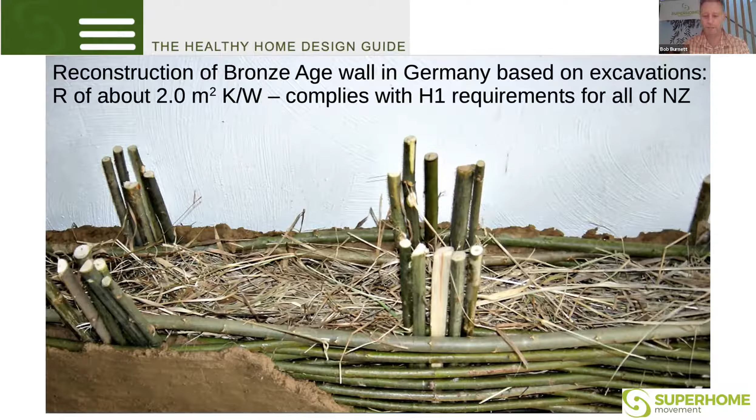What I also wanted to do is show where the Healthy Home Design Guide fits amongst other guides and standards. The Healthy Home Standards is the standard for landlords, and we were talking to landlords about this last night, so they're probably more familiar with this than most designers.

But basically, heating - just heat the main living room. Homestar 6, heat the main living room. We're saying you've got to heat the whole house and maintain that temperature in the healthy range of 18 to 24 degrees, at least 75% of the time, and prove that by your monitoring.

Insulation - we've gone away from the R value to look at what heat do you need to heat the house in a year, what heat do you need to retain in the house over the course of a year. What is a kilowatt hour per metre square per year rate of heating? That's what we've looked at, because these R values, we've seen from research from Beacon Pathway and others that they're not even giving half of what those numbers are due to all the thermal bridging.

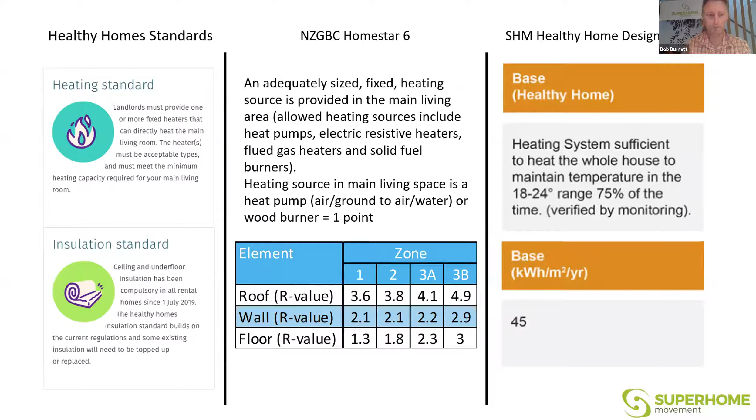Ventilation standard and Homestar are basically the same thing - open windows, kitchen and bathroom extraction fans. We're saying kitchen and bathroom extraction fans are good, but a whole house ventilation system is needed - not an HRV system from the roof cavity, but a whole mechanical ventilation system.

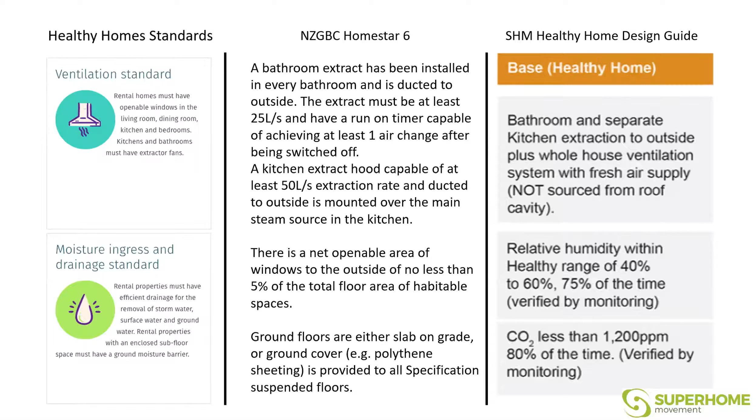And humidity is really important to control. It's humidity that's causing the mold. And then, as Katheren mentioned, carbon dioxide is also important.

Why is it important? This is a slide out of a house of mine that's been monitored over the winter, from July last year. This is a bedroom, quite a well-sealed bedroom, someone sleeping with the door shut. You can see that the carbon dioxide levels are 4 times what they should be. Even downstairs, the carbon dioxide levels occasionally go over the 1,000 parts per million threshold. So this just gives you an indicator of what's happening with other toxins.

That's what it's really for. But until we did this monitoring, I had no idea at all. So that's the value of the monitoring that Brandon will talk about later.

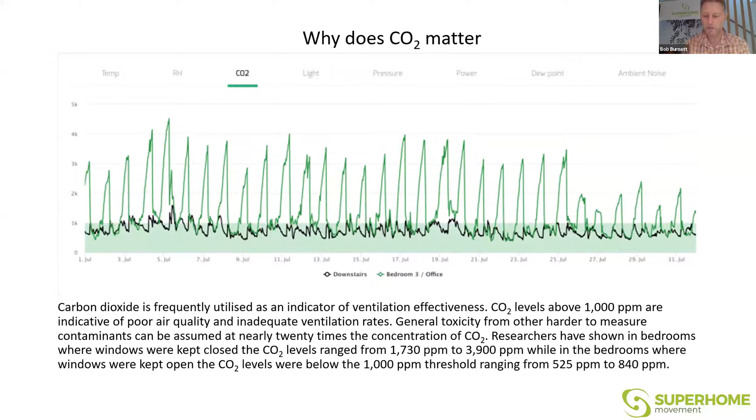Draft stopping, air tightness - well, unreasonable gaps and holes in walls is a pretty low bar standard. No air tightness is still a low standard. Australia have got air tightness standards. We're saying less than 3 air changes an hour is what we should be trying to achieve for a base level. That compares with best international practice of 0.6 air changes an hour, or on the other scale, your old villa, which is probably about 20 air changes an hour.

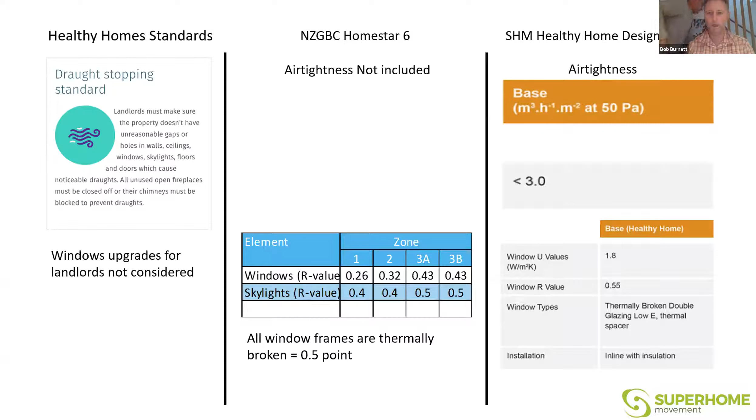And windows - an upgrade of windows. So we want thermally broken windows with a spacer, in line with the thermal envelope, not stuck out in the cavity like they are now. So yeah, that's what I've got. I will quickly swap with Bob and hand you over to Bob.

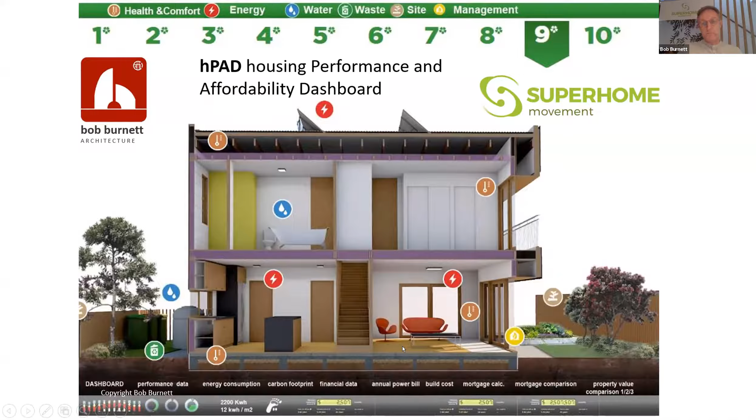So we talked to a group of property investors last night, and some of them were saying, oh yeah, that's all very well, but you're just promoting yourself, and how can people afford to do this? We can't even afford to put a bathroom fan in.

Some things we've done don't cost more. Advanced timber framing - I thought this GIBFIX idea, which this was the first house to have, though it wasn't actually called this at the time, would just be the new normal because it's actually cheaper - less timber, more insulation. Removing dwangs. There's a number of things we went several stages further with and developed further.

Insulation's cheap. And if we can work out how to fit more insulation and not have three studs at the corner, and not have three studs where we're joining internal walls, it's a no-brainer. I'm sure some people have clicked onto this, but the majority of people are still having thermal bridges at the corner with no insulation.

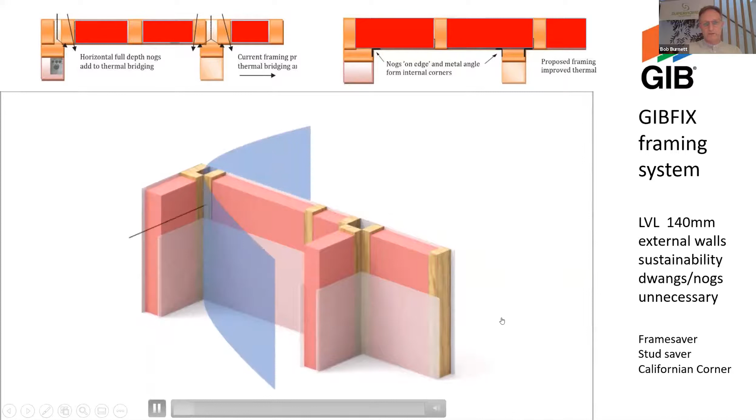And these sort of problems are still there. So this sort of thing, I call it green by stealth. If it doesn't cost any more, it just should be mandatory. It should be code, but it's not. So we need to make people aware of these things, particularly these things that don't cost any more.

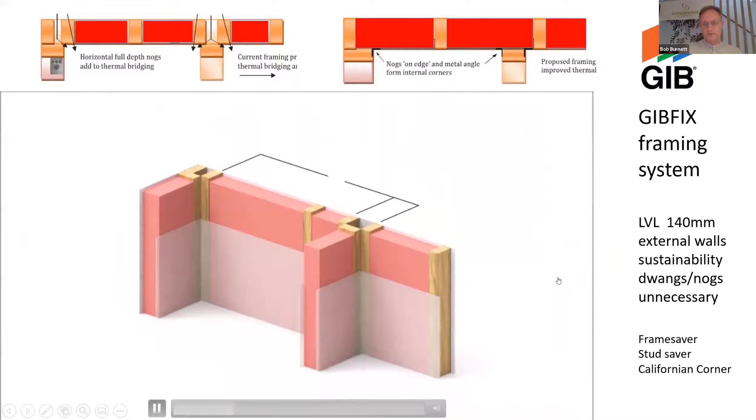So I think we've got these really cool sketches, courtesy of John Baker, architect, and he's done a really good job with this. And I think this is probably the next stage on from just doing enhanced timber framing and recessing the windows, what we did in that previous job.

But having an internal services cavity is a great move, and having some air tightness. I think most people will be starting to realize that air tightness is important on a number of levels, to keep the moisture out of the walls, but also to stop the heat escaping that you're paying money to heat. You don't want it all going through gaps and out the window. So how everything fits together is really important.

And the windows are the single biggest heat loss in most houses. Just by recessing the windows into the wall and having them in line with the insulation, rather than overlapping the cladding where the building code tells us, is going to make a significant difference.

And then, high performance windows. Sure, it costs more, but it has a really, really significant impact on your ongoing costs. But also you won't see any condensation. We don't know what condensation is, we don't have condensation in our houses, and that's the way it should be. In some countries, it's illegal to have a home with condensation in it.

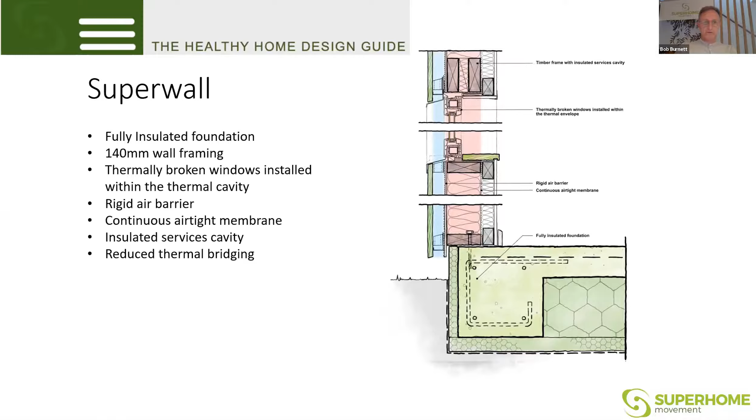It's more difficult to keep it cool. But it's also less energy to do a little bit of cooling on those few days of the year where it's stinking hot and you need to turn on a heat pump. I don't think heat pumps are required for healthy homes that are designed properly, super homes, for heating, but there might be a few days of the year in those rare heat wave days.

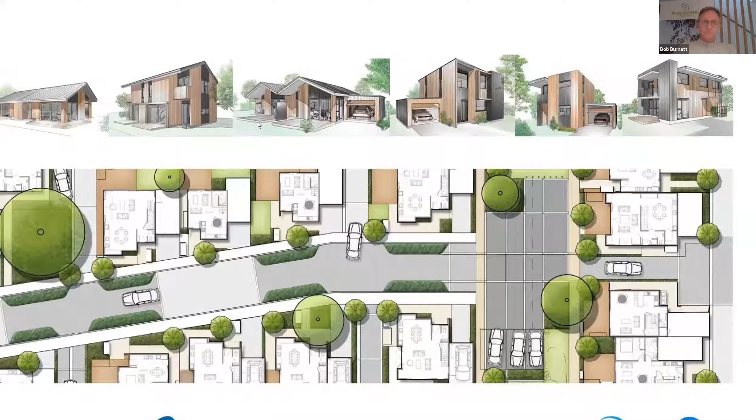So what we did is we blew it apart and made sure every single dwelling had all-day sun access, and just about every room had all-day sun access. There is some multi-unit across the back, but it's north-facing. There's green space, there's a bit more nature.

What we want to do - and this is a few years ago now - is think about getting nature into our designs and getting the cars out. A further improvement would be to remove these courtyards and turn them into orchards and have the cars on the edge. You don't need to drive up to every dwelling. I think that's a key point.

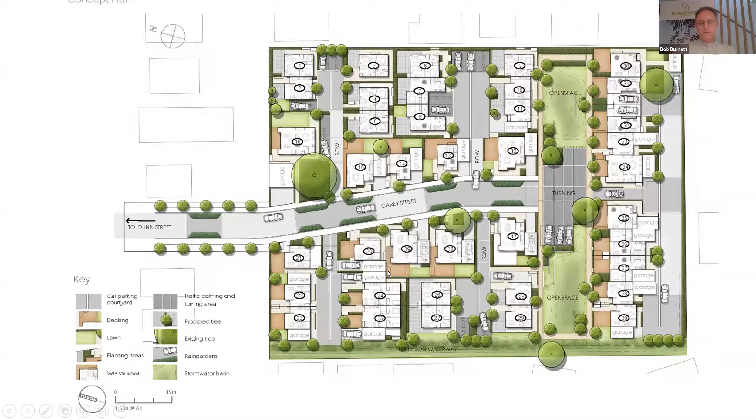So I'll leave it at that because we've got several other speakers. We did have one or two 10-star homes in there, but we reduced them to 7-star.

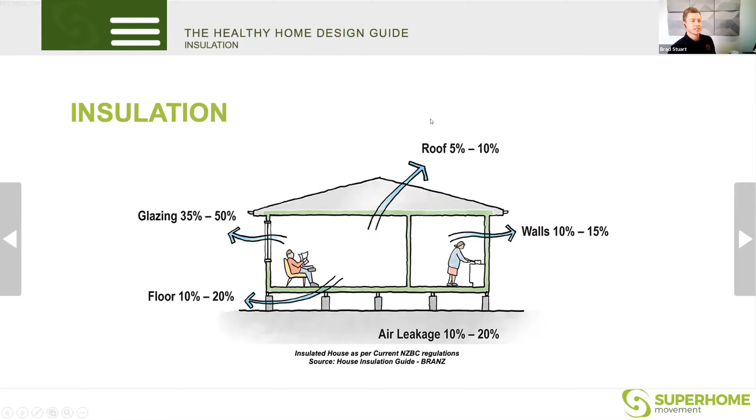I missed that slide. I think this slide encapsulates what I was talking about and the importance of those things. We'll shoot through this.

Thank you for watching that. Hopefully, we're a local company, and as I said earlier, passionate about what we're all doing here. Sorry, Brandon, if I took up too much of your space there, but on to you.

I realize people have time for it, so what I'm going to do is open with a statement my mother always used to tell me, still tells me to this day. She says, don't listen to what people say, watch what they do. So I'm talking about the evidence. Where is the evidence? You can say your home is healthy, you can say it's energy efficient, but without actually modeling it and monitoring it effectively and providing the evidence, you can never prove it.

This is a very uncomfortable conversation for people to have, because sometimes you hang your hat on a particular model or an outcome, and you don't want to be proven wrong. You have a lot riding on being proven right. But I believe people should become more comfortable with actually being evidence-based and data-driven.

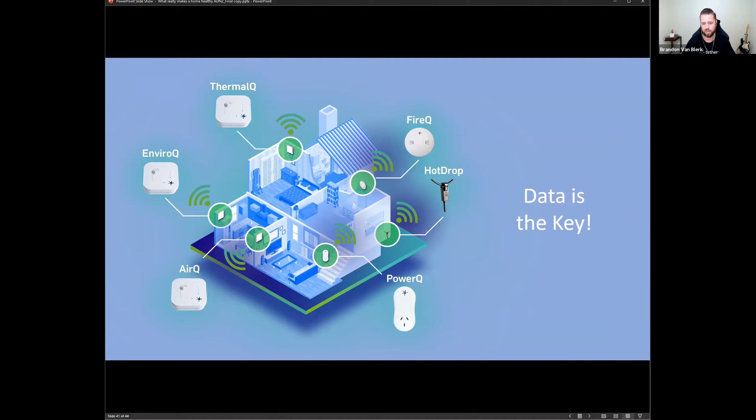There is a finance part to that, obviously, because improvements require finance, and improvements can range anything from very expensive to cost effective. But the good thing is you can update the model, and when you update the model, you can then monitor the impact, and the circle goes round and round. This continuous improvement model becomes something you can leverage and ensure that the environment gets better and better, both from a construction point of view, but also from an operational perspective.

I flew through that because I know we only had 10 minutes. So if you have any questions, just think about it. Think about evidence, think about data. It is absolutely imperative, and those that are not scared to use data to back their claims up will win, I think, in the future.